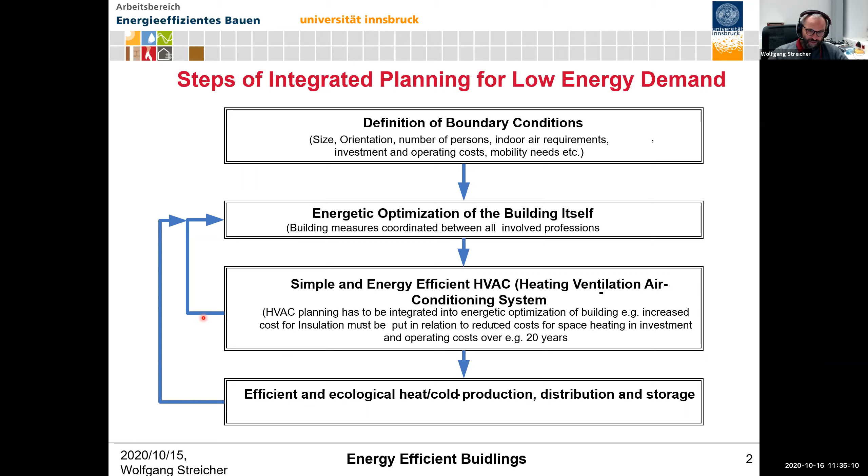Okay, but where do we get the biggest mistakes? The biggest mistakes in buildings, so this is statistics of a large building company, Bilfinger Berger, that's a worldwide acting company. And they said, well, the biggest share of mistakes is planning mistakes. So that's another issue, that people don't give enough money and time to do proper planning.

And once the planning is wrong, then you run into a huge amount of costs, because then the building is built maybe wrong, you have maybe even high investment costs, or it's not even functioning, or you boost the operating cost. So this is one very big thing. Take enough time for planning, but then you have to be sure that the planning is done in a good way. And the next biggest thing is missing sensibility during construction.

That means who is working on site. Normally the cheapest workers are on site, because nobody wants to pay more money than the cheapest ones. But the cheapest ones, they are of course not educated. They don't know what they're doing. They just do what they've been told to do, and they have to do it as fast as possible. So they have to make so many square meters of wall per hour and so on to get it cheaply done. So they have no sensibility at all for what a building should look like, and even less what an energy efficient building should look like.

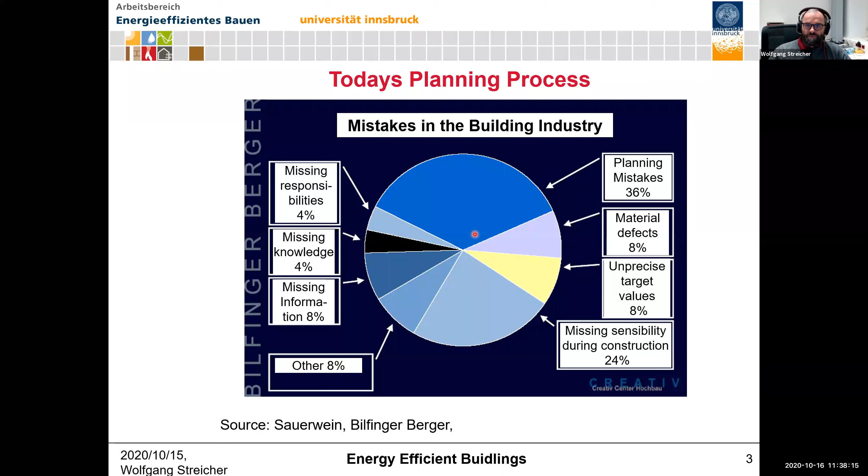Oh, well, our time is already running and I'm not really at my theme yet. So we'll speed up a bit, but this is a very crucial point.

So that's the timeline of construction and building use. In the planning phase, with very little cost, you can change a lot in the building, and you have a very high influenceability, because changing a plan costs far less than changing something on site. And once the building starts being constructed, costs are strongly increasing if you want to change anything. And if you want to change anything in the construction already there, then you're more or less lost. So we have to put far more effort in the planning phase.

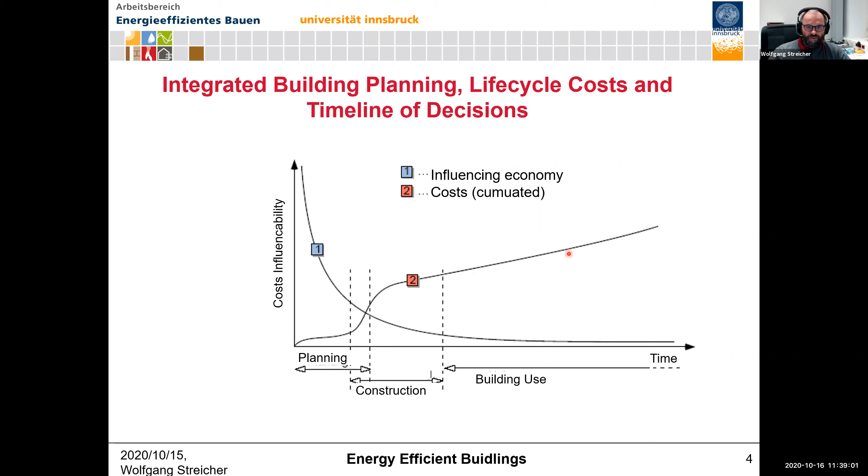Well, finally, how are the energy flows in a building? You should have learned that in your study. So we have lots of energy flows, and the building is working according to the first law of thermodynamics and second law of thermodynamics. The second law means you have an energy flow from high temperature to low temperature via the roofs, via the floor, via the walls, via the windows to the ambient, what we call transmission losses. Then we have the ventilation losses.

You have to exchange the air in here to have acceptable air conditions. That means low CO2 content, not too high humidity, keep dust, odors, smells, whatever, low. So you have to exchange the air. And if you take in air from the outside, you have to bring it to the temperatures you want to have inside. For sure, you have internal gains here. You have people, you have cooking, you have lighting, whatever in here. Lighting has become small with LEDs, but nevertheless.

Then you have, of course, the sun shining through the windows, heating up your house, which is nice to have in winter, but not too nice in summer, because then you have to do cooling and a lot of operating costs again. Then you have two arrows here. This is the thermal mass.

So if you have a higher temperature in the room than in the wall, then you have an energy flow inside the wall. And if the wall is hotter than the room, then you have a flow out. So how can this be done? Well, during the day when the sun is shining, in summer you heat up the room more and more, and then if it's hotter than the wall, the heat starts flowing inside the wall. It's not heating up the whole wall. It's starting to flow inside in a transient heat transfer way.

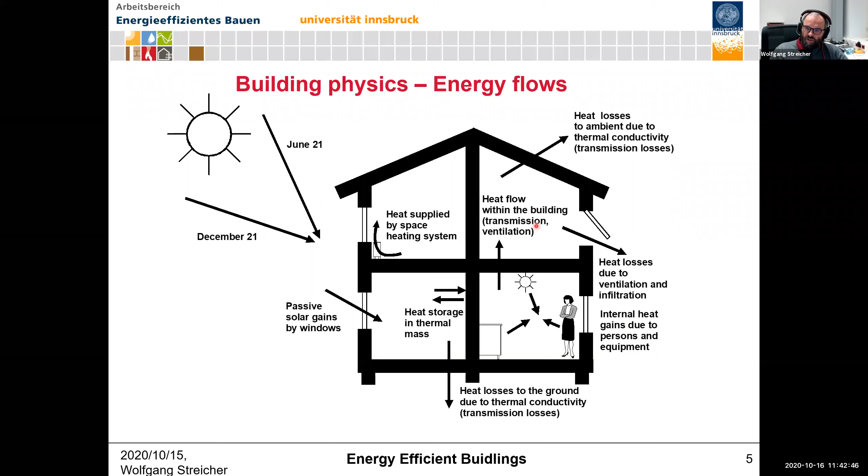So if you look at it in a graphical way, these losses: the UA delta T, that's the transmission losses, and the V dot rho Cp delta T, that's the ventilation losses. So the UA delta T goes from one media to another media via a wall. Always, if you have this situation, one media to another, you use the UA delta T. You use it also in heat exchangers. And if you heat up or cool down one media in the flow, then it's that formula here. Okay, both of them are depending on internal minus external temperature.

And if it's cold outside, then you have to do heating. And the losses follow a linear line, because that's a linear dependency. So the colder it is, the higher the losses become. But on the other hand, you have the sun coming in, you have people working in there. So in real operation, you're working somewhere here. Well, that is changing all the time. When the sun is out, you have less real demand to put in. If the sun is not there, you have no additional gain, so you have to cover all the losses, especially at night. When people are in there, you get some internal gains and so on. So you operate somewhere here, and the missing part is the active heating you put in.

And the same is about for cooling. If it's too hot outside, then you have to do cooling. If it's too humid, that's not in here, you also have to do dehumidification. And there is some part of the energy demand that is independent from ambient. So this is domestic hot water demand and household electricity demand. So it's not depending on it.

But this is not a good building. A good building, at least in my climate, would look like that. In my climate in Innsbruck, we can do it. In Nepal, it's a bit tricky. Up in the mountains, it's possible that you say, well, I make the building in a way that I have no cooling demand at all. Well, how could that be done? How can I say, well, I don't need a split unit and the building will not heat up?

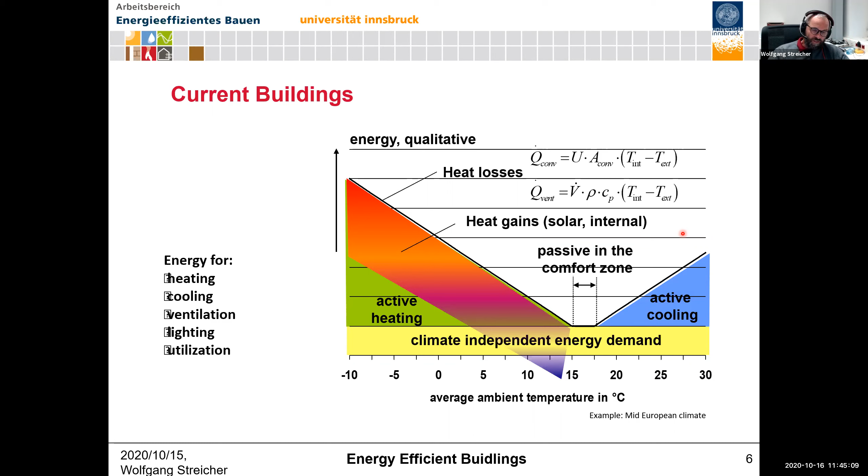Split units are not possible, but small ventilation units will have more and more of these heat recovery units in there. Well, you see, they get the same heat demand, but with far less input.

And if you insulate the building in winter, once the sun is shining and you have some windows in the right direction, you don't need heating at all when the sun is out. So the sun is heating your building. And only if nobody's there at night and thermal masses have given all their heat away, you have to start the active heating. So the internal and the external gains become far more important and do far more reduction in low energy efficient buildings and in high energy efficient buildings.

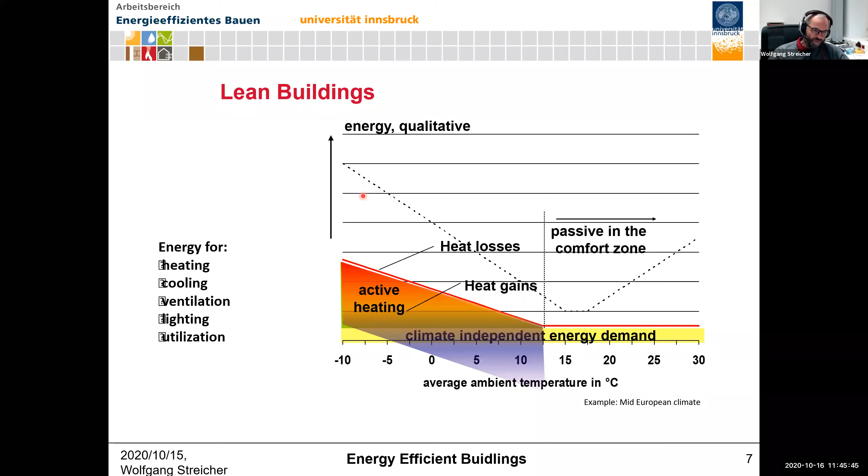Okay, well, we said about most of that. You can read it. We had these formulas. By the way, these formulas, you can also see them completely differently. You can say, who is responsible for what of these figures here? So who is responsible for the A, for the area? Well, that's the architect. The architect is defining the design, and he defines all the areas of the ambient walls. Well, who is responsible for the U values? Well, that's the building physics guy or whoever. So who designs how much insulation do we put in here?

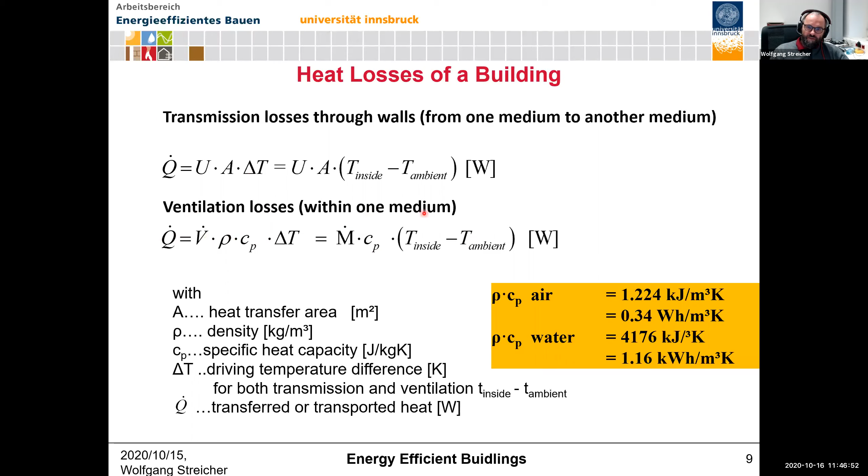Who is responsible for T inside? Well, that's the final user. And who is responsible for T ambient? That's the climate. So we have 4 completely different groups or sources of these figures, and that makes it a bit tricky to make the calculations right, because you have to get the right figures. Well, you could do the same here, but this says the ventilation is the user or the technology behind. Well, this is air, and here again we have the user and the climate.

Well, how to make it energy efficient? We can start with the A. We can start with the ambient area. So if you have a volume of building, you can place the volume in completely different shapes. And I know in your country you have these high towers with many stories on it, and if someone is marrying, your parents have to put another story on it to give the young family room. So this is already quite good, but if it's standing alone, you have still a lot of outer walls, and if you put it together and have it as a row house, then it becomes far smaller. But this is already quite good compared to a building like that, where you have far more outer surface.

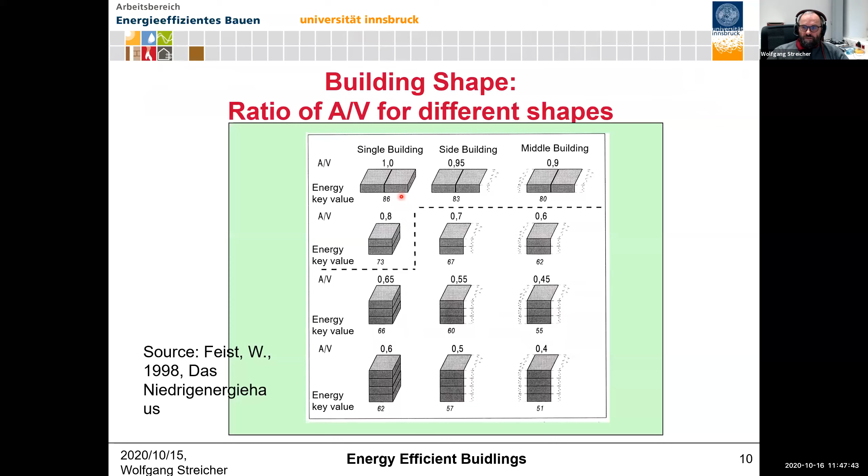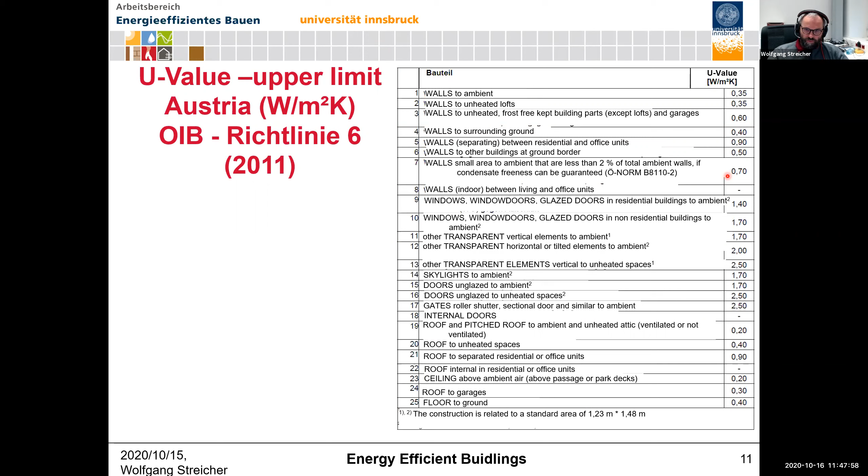Well, U values: in my country, you have upper limits of U values. So we have some building codes where you're not allowed to go higher than that, but these values are not very good. So we should have reduced them by far since a long time, but somehow it's not working, but I don't go into this detail. Well, you can build buildings with very, very low energy demands, and this you can do all around the world. It's not only for our climate. So in my climate, space heating is the main demand of buildings, or old buildings, they use a lot of space heating energy, and domestic hot water and household electricity. But then building codes became more and more strict.

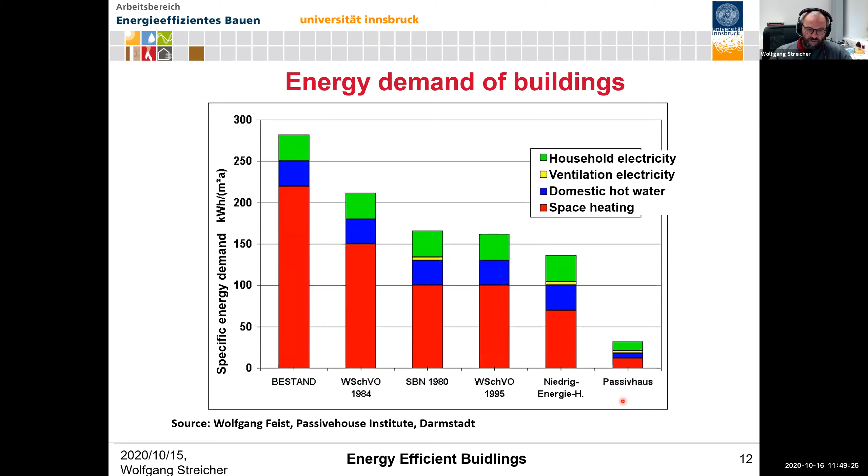In my country, it is sometimes nowadays even more expensive to buy 2-pane windows instead of 3-pane windows, because all the production lines of the companies producing windows are put to 3-pane windows, and if they had to change back to 2-pane windows, which are worse in terms of U value, then sometimes you even have to pay additional costs. So nobody's doing 2-pane windows anymore in my country. Of course, heating is more important here.

Well, the target criteria we had already for the whole system: make it as simple as possible, not complicated. Everything you can spare is spared money, and it's spared operating costs and spared maintenance. What you find in literature as a smart building is a building that has a lot of electronics in there, a lot of sensors, a lot of actuators and things like that. And they say you can optimize your building and you can run it from your smartphone and whatever. But on the other hand, every sensor you have in there needs maintenance, and it breaks down after a while.

And if it's not working, who is repairing it? And even if it's working, who is programming the controller in the right way that it's really working? So my experience is the more electronics in a building, the longer it takes until it may run, and it runs worse in the end than a simple building without all that stuff. So in my opinion, they just sell you a lot of stuff for nothing.

The last thought on this is: how long do you get spare parts for electronics? So if you have a cell phone like this here, how long do you get spare parts? Or a car with electronic parts in there, how long do you get it? For a car, you may get it for 10 years. For a cell phone, you don't get it at all, so you have to buy a new one.

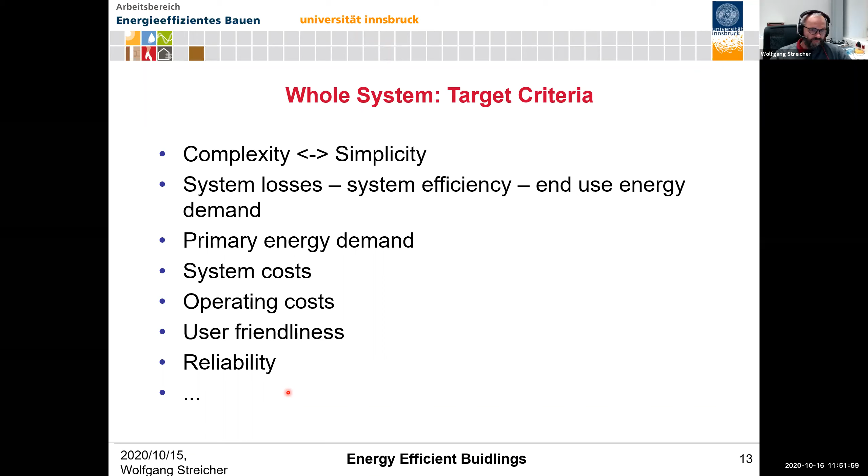Okay, what are our building materials? Well, in my country we have, let's say, three main materials: bricks, wooden construction, and concrete construction, where we don't have the pictures now. How can we classify it? The brick is always sold as if we want to build massive buildings, but if you have a side look, a brick is not massive at all.

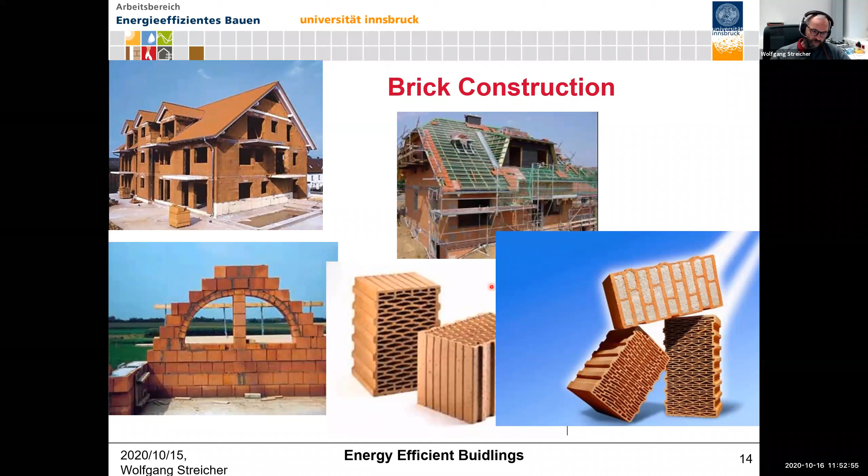The only thermal mass we can use is this very tiny part here, where the heat can flow in and out. Why should the heat in 24 hours move further down here and go up here? So a brick is something very lightweight and has not really thermal mass, at least these types of bricks. The thicker this part becomes, the bit more thermal mass you have. Interestingly, wooden construction and brick construction are very similar in their properties. It's completely different if you build with concrete. Concrete is a very good thermal mass that has no pores.

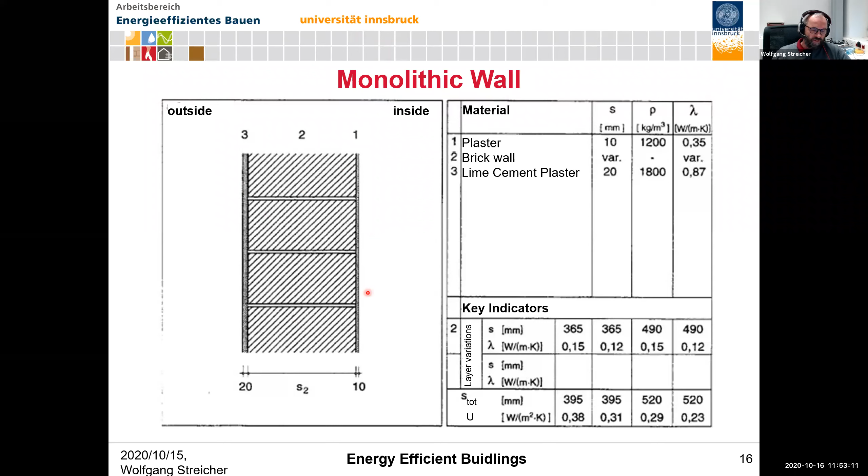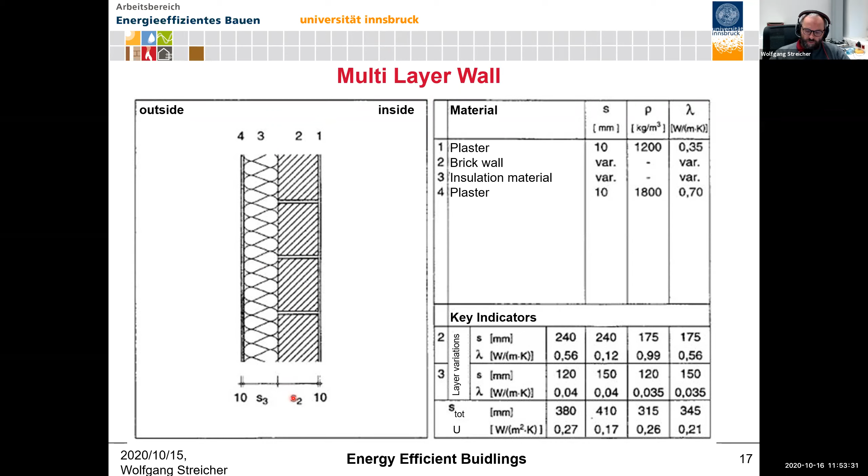It would be cheaper to make a monolithic wall, but there you need bricks like that to get some nice U values. In my opinion and from all we found in the last years, it's far better to make a construction where you separate the static issue and the thermal mass from the insulation. Put the insulation to the outside and the thermal mass to the inside, which is also the static function. Separating it makes walls thinner with the same U value, or with the same thickness you get a far better U value. And then you have to look for thermal bridges and avoid them.

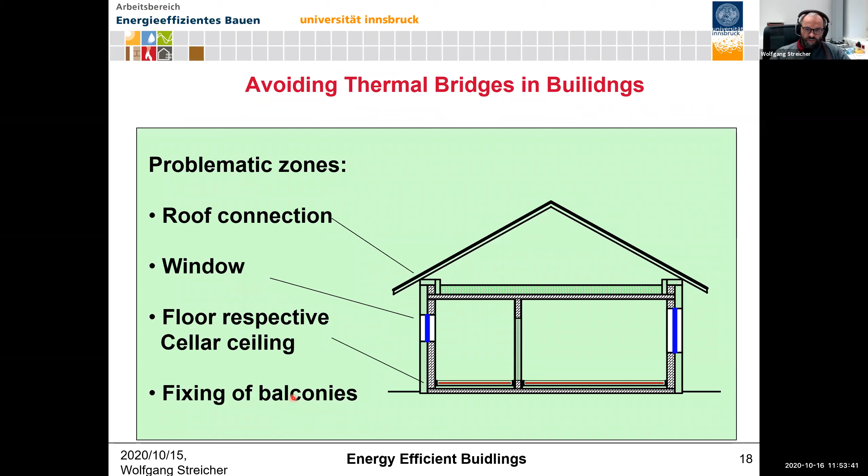You know thermographic cameras. I don't go into too much detail here, but I'll show you a bit about how thermal mass is working. Some of you have seen this picture before. I have a transient simulation of heat transfer with this partial differential equation. We have a concrete wall of about 33 centimeters, and a variation of 6 degrees temperature over 24 hours on one side; on the other side, I fix the temperature.

What we see is that the wall at the outside doesn't get the maximum temperature because we have an alpha, a heat transfer coefficient, from the air to the wall. So here we have the highest temperature reduction. The temperature variation even on the surface is only 2 degrees when the room has 6 degrees. Then, to make the heat flow inside, it needs a gradient, otherwise no heat flux, and to take the heat out it also needs a gradient. So the variation becomes smaller and smaller, and after 10 centimeters of wall thickness it's not really visible anymore. So thermal mass means a lot of area, not thickness, to make it work.

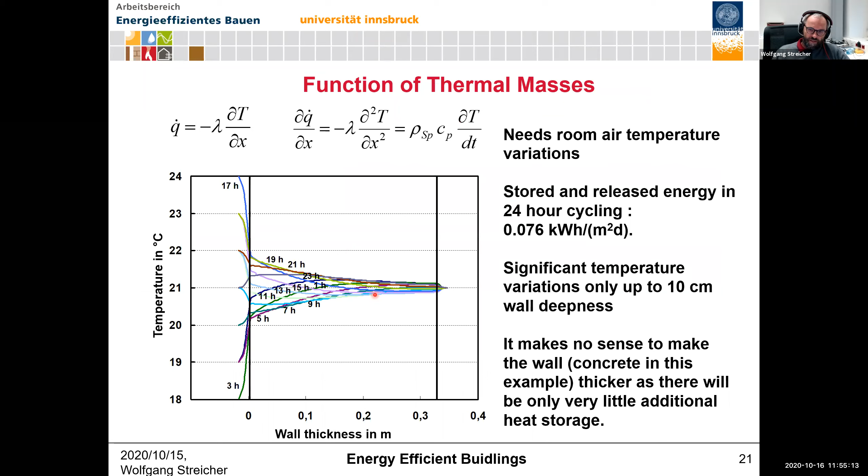And there is no material. It's also quite important, because sometimes people sell you, sorry, the idea that a material can be thermal mass and insulation at the same time. But thermal mass, to get the heat inside as much as possible, needs a high thermal conductivity. High thermal conductivity means no air in there, no gas in there, because gas has a very low thermal conductivity. So that means a high density.

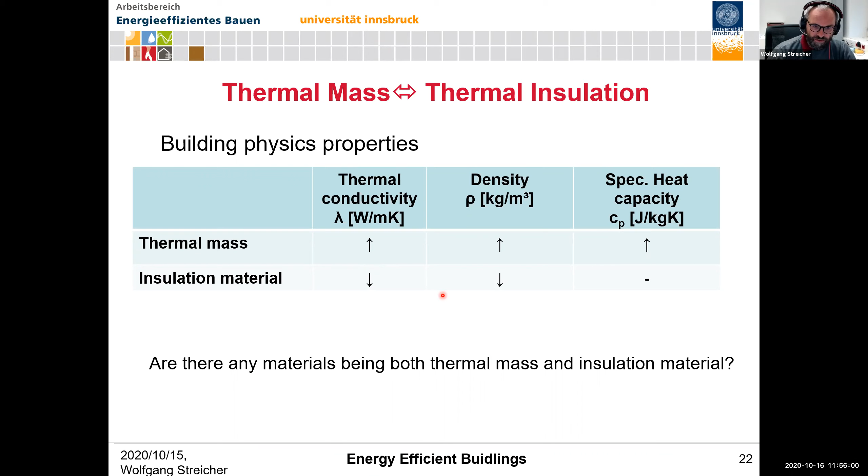And to store a lot of energy in one volume or 1 kilogram, we need a high cp. So this is thermal mass: high thermal conductivity, high density, high specific heat. An insulation material, well, should not conduct the heat, so it should have a very low thermal conductivity. And to get this, it means a lot of gas in there. If you take the fur of a sheep or a bear or whatever, that's the same thing. You have a lot of air with very little surroundings around, and that makes an insulation material. So there is no thing that is thermal mass and insulation material in the same way.

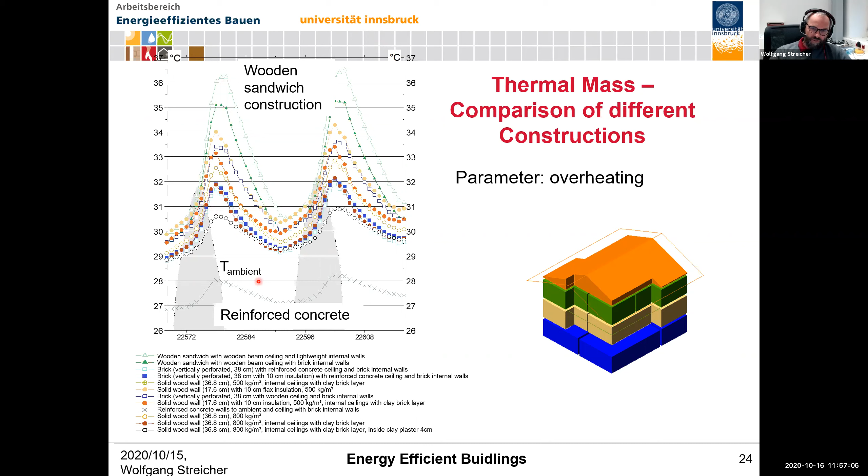But even if you cannot cool down the building at night, you can reduce the temperature peaks and then the peak power of the cooling machines. And you can size the cooling machines far smaller, because they can now run for a longer time, and you can run them also at night, where the recooling temperature is lower, and pre-cool all your thermal masses, so you start with lower temperatures during the day. So thermal mass also helps you in reducing investment cost.

Well, then we come to the sun. My time is really running, so it's tricky, but I'll see how far I can come.

That's a solar position plot you should know from your country. You see, in summer the sun is nearly 90 degrees above you. In winter, it's about 40 degrees. And out of this graph, you can derive in which direction the windows should face. What is the background behind it? In summer, you don't want to have the sun in because it's hot anyway. And in winter, it would be nice to get some sun into your building, because then you need to heat it less. So in what direction should the windows face?

If you let them face to the east, what is happening? All year, the sun is rising in the east, somewhere a bit more to the north and a bit more to the south, but the sun is shining at a very flat angle onto your window and you get all the sun in. So in the morning, the east windows get all the sun, and in the west too, all year. All year you get a lot, but you get even more in summer. In winter, the sun is already moving away from your side. And in the west, you get the same thing, but in the afternoon.

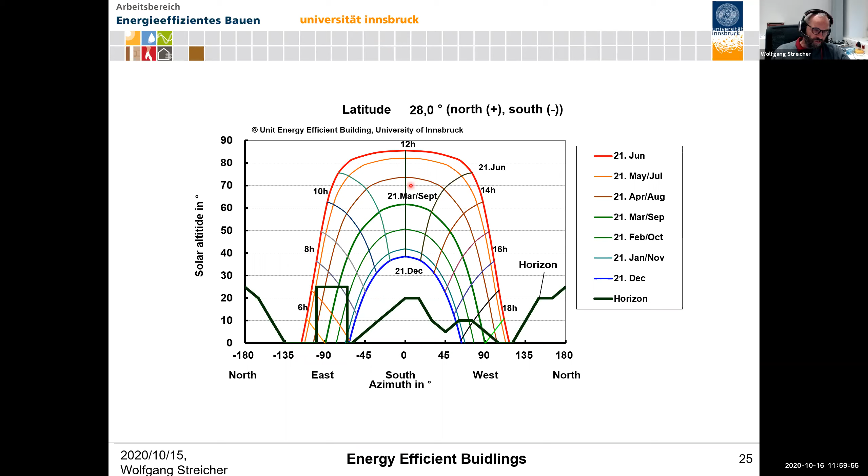And in summer, you get it full. So you have here in summer a lot of cooling demand on the east side and on the west side, and in winter far more heating demand than on the southern side. So this is very important for architecture, by the way.

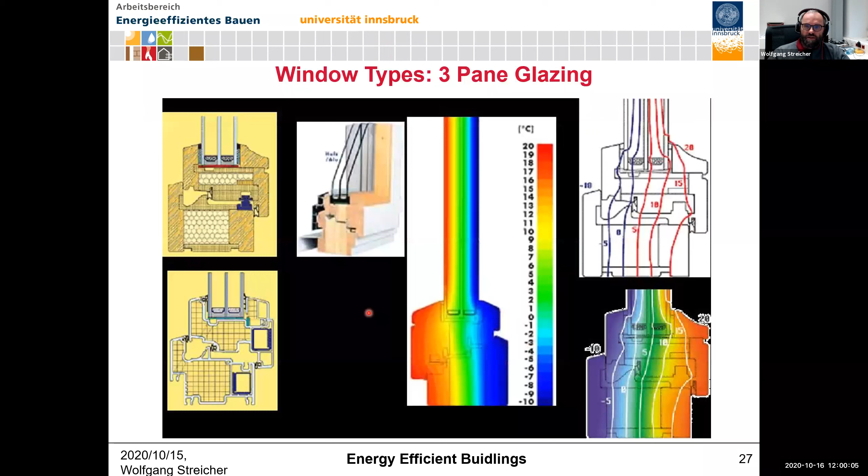Well, and then we have different types of windows. These are 2- and 3-pane windows as we know them. I don't want to go into detail here because time is running. Well, you also have different ways of mounting it. So the best way is to mount it so that the window is within the insulation layer, and here the insulation is even overlapping. So if you calculate thermal bridges, you get the best values, including the thermal bridges, if you do it that way.

By the way, we had a passive house conference in China, where they also built large-scale passive houses, huge passive house settlements with 20 stories and about 20 buildings like that. And they trained their people on site how to do it that way, and how to make other details in a passive house. So we were there on site, and we saw every worker had to pass by and was introduced to how to build up these details and why they are important. So that was the way the Chinese were dealing with this problem of unskilled workers. And I think it would be very good if we had it more around the world.

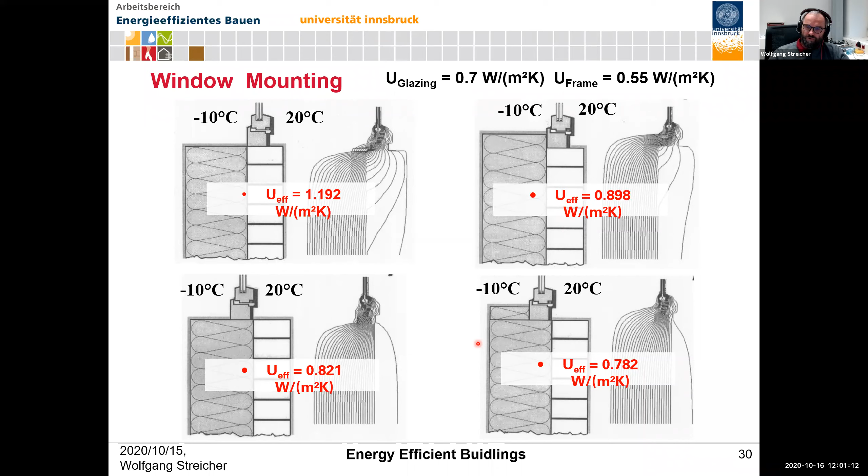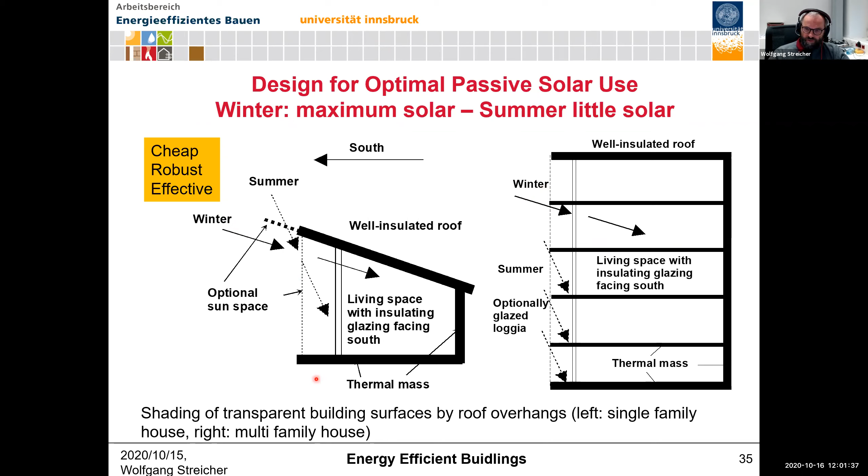Well, how to calculate that, I would skip, but here again, the orientation, this is nothing very new with the sun, which I told you. So a single family house, a multi-family house, if it's facing south, you get all the sun in winter. Well, this is for my climate. In winter, it's a bit more flat. For you, it's 40 degrees here. But in summer, it comes from nearly 90 degrees, so you have no sun at all in there. And this is also not new. Old pueblos were built that way, so you can have a look back.

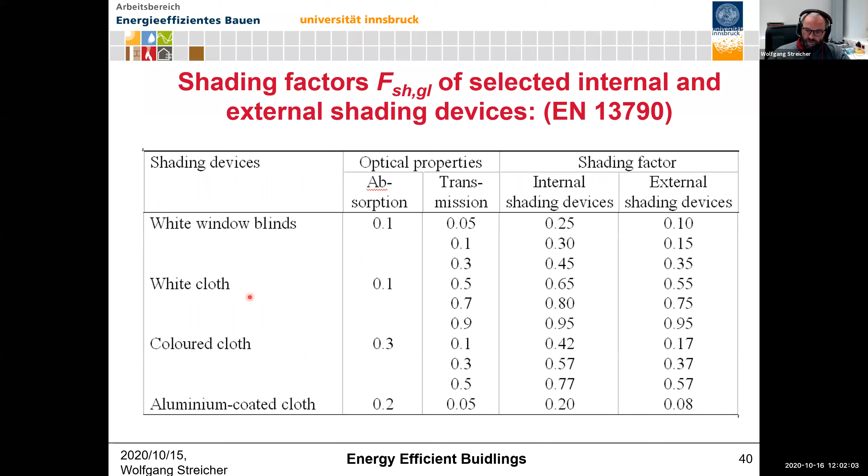Well, shading is a wide field. There are many different kinds of shading, but just one idea is, well, we said it should be possible to open the windows at night. And to make this possible, the shading should be burglar safe, and it should be safe against rain coming in. And not many of these shadings allow it.

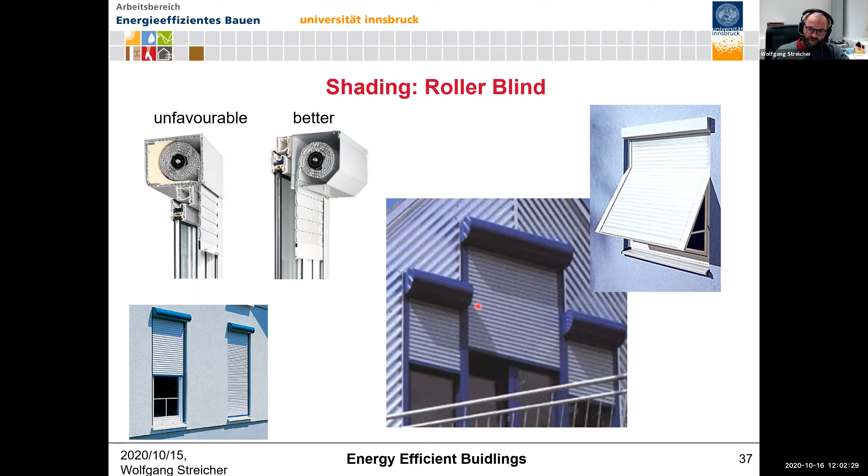I mean, this shading would be quite good because if it's closed and shut, then no burglar comes in. Also, these are quite good. But here, that's not really burglar protection. And here, well, if you close it down, it's burglar protecting. But if you open the window behind, there are just 2 little holes in there, so you don't get real ventilation. So these are things you can think of.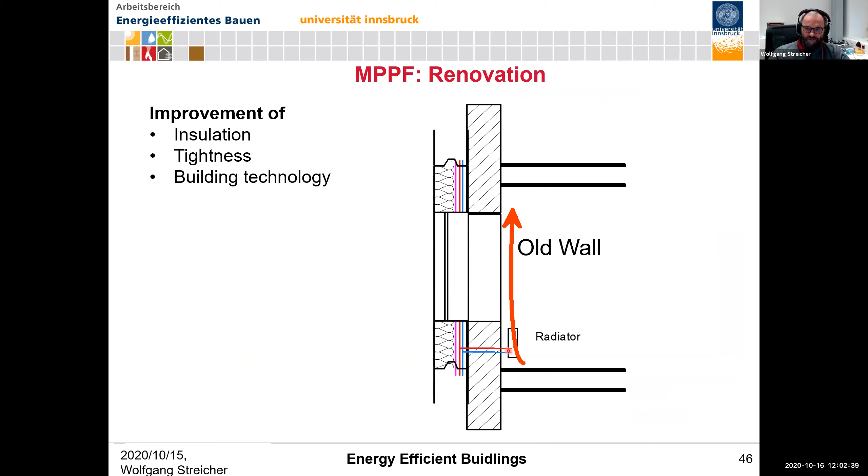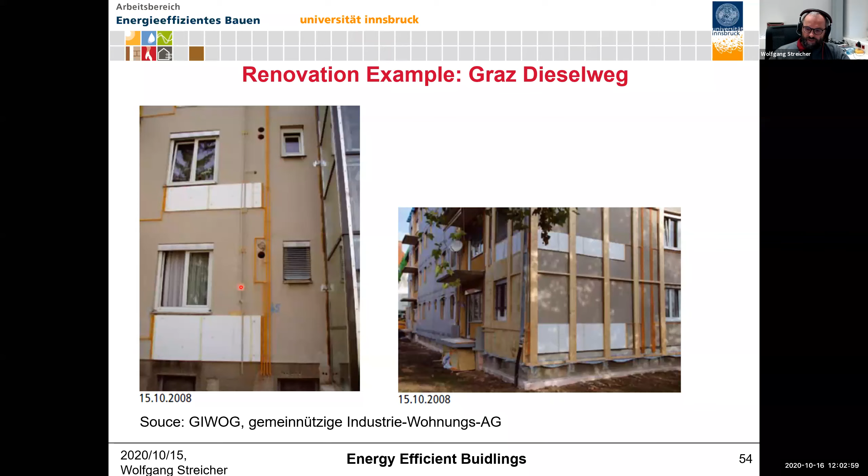Well, I think my time is gone. I could tell a lot about renovation, maybe a very last picture of a nice example of how you could do renovation. So if you have an old building, well, what they did, which is not the optimum but still quite good, is they fixed a new heating system from the outside and made all the piping from the outside. And then they mounted very large prefabricated panels, including the windows and insulation material and everything. That means first it needs some technology. First you have to do a laser scan of the whole facade to get it really working, because it's never a completely straight area. It's always an old building.

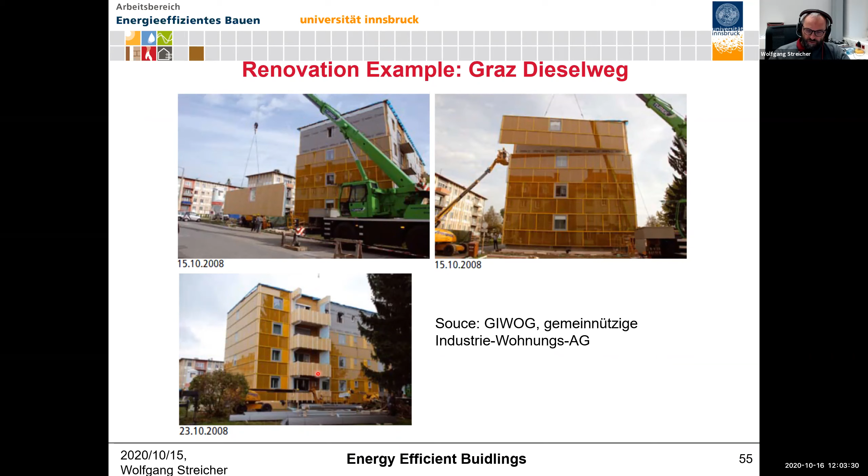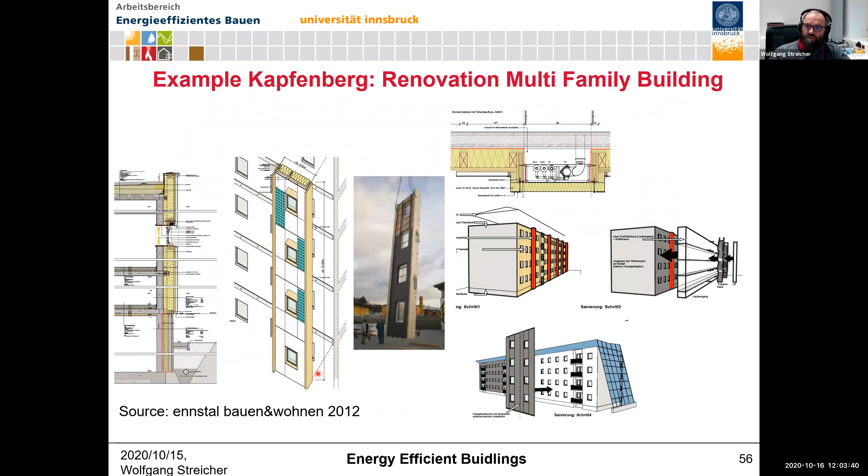And also to avoid thermal bridges, they put the whole balcony in prefabricated elements and brought it to the building site. There were other examples, but that's something we more and more try to use, prefabricated elements for renovation systems. And finally, with the same system, we renovated a building in our university, which looked quite bad. It was from the 70s, was very bad, and we are now down to a very low energy demand. And in our climate it's possible, the whole building has no cooling machine inside. We cool down by opening the windows automatically at night and letting the building cool down.